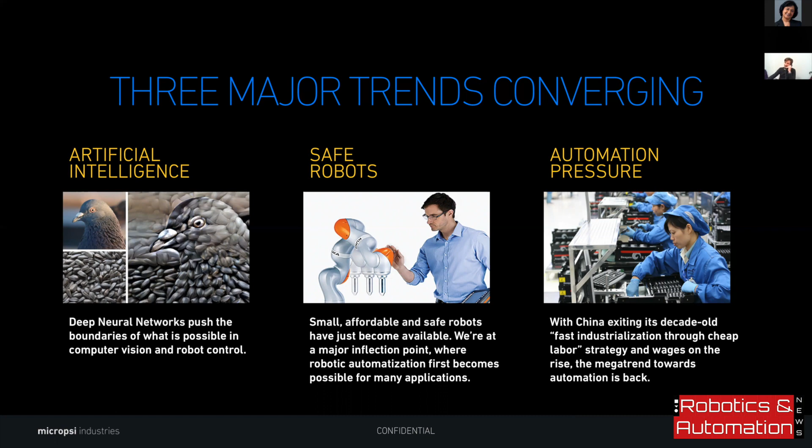So when I talk about industrial robots, especially in the context of artificial intelligence and deep neural networks, people just assume, because they know robots from the movies, that robots are inherently very smart things that know how to do things. And that's because most robots people know are from science fiction and are really just people in metal suits.

So in traditional industrial robotics, problems were solvable with robots when they were fully understood geometrically. There was nothing that varies about it. It always looks the same. It always feels the same. There's really no reason to have any eyes or any brain. You just stupidly make the same movements all over again.

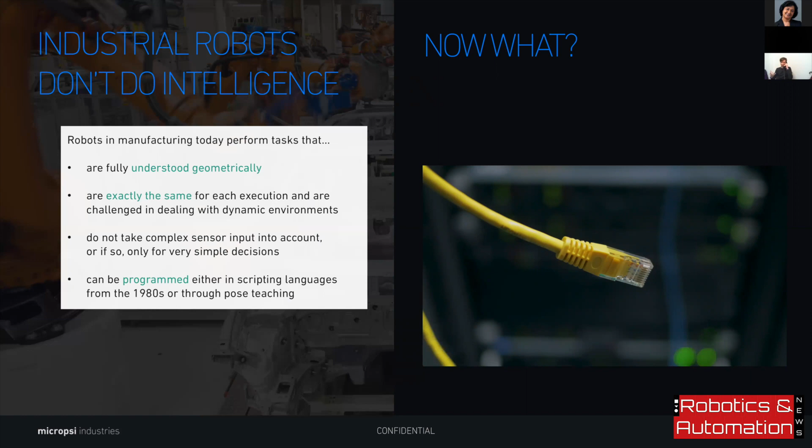But if you encounter one of these, a cable or anything that is soft or wobbly or fiddly in some form or moves about as you're handling it as a robot, you were out of your depth in classic industrial robotics. And what we do is essentially give the robots the ability to deal with these types of problems.

So the technology allows you to create skills for industrial robots that would be impossible or at least very hard, and you need a very high skilled person to create them. And for us, it's essentially something that anybody, you and me, or anybody you meet on the street, could teach the robot to do as a matter of a couple hours, two afternoons.

And then after you've done the training, after you've showed the robot how a good movement looks for whatever you want it to do, then the robot knows how to perform that task and react to the environment in a systematic form and in a clever form. And this is where I am going to pick up the hand-eye coordination metaphor again.

So if you imagine a human plugging in a cable into a socket, what we do is not determine exactly where in space the socket is and plan an approach, how do we orient our hand towards the socket, and then make a very precise linear movement towards the socket. And then if our pose estimation for the socket was right, then it will fit by the millimeter and everything will be fine.

What we do is we just move those two things towards each other, and we make a sequence of very small, very fast corrections as we approach. We coordinate the movement of our hand to what our eyes see. And the technology essentially gives a robot the ability to learn precisely that.

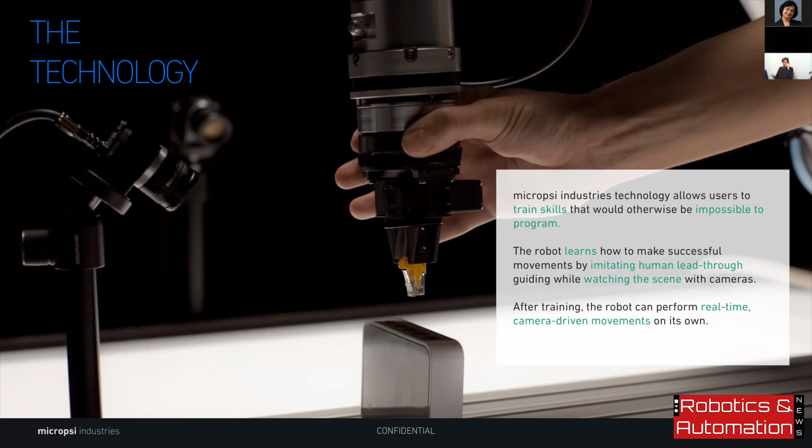So the robot will approach when it plugs in a socket pretty much like a human would, approaching it, going a bit to the side and seeing with the camera, okay, that's too far right, comes back and makes a very confident, very natural-looking, very organic-looking plugging-in movement as a human would make it.

So what's behind there? What is the technology that's on sale from Micropsi Industries? It is essentially a full stack that allows you to do 20 or 30 hertz real-time control from cameras in a closed-loop fashion. So all of this is ours, has been developed here, and allows you to generate skills for industrial robots very easily without a single line of programming.

All you need to do is buy the robot, buy our kit, put up the camera, make sure the cameras see what they need to see to solve the problem, and then you guide the robot through the movements, send the data off to the cloud for training. It comes back, gets installed on the robot. The robot knows how to make the movement.

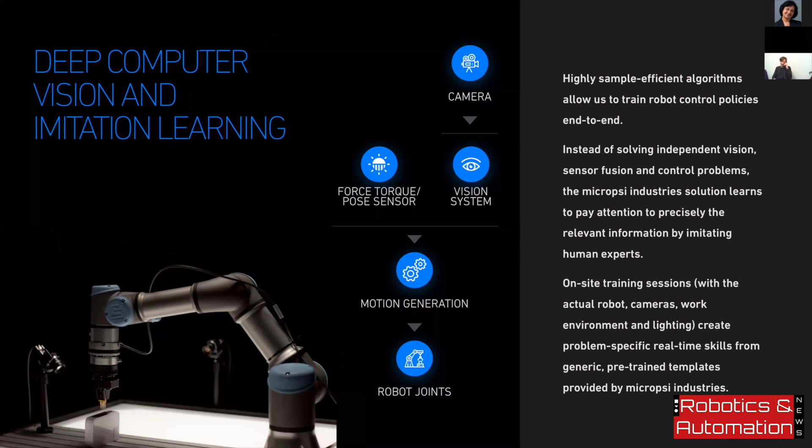Then you can cut the connection to the internet, so you don't need to be connected all the time to the cloud. Just for the training, you need to do that. And then essentially you do the rest of the automation solution that you want to do. Integrate this into your wider program of how material flows through your factory. And as a result, you just automated something that previously only a human could have done. And normally I show a video that shows that in action.

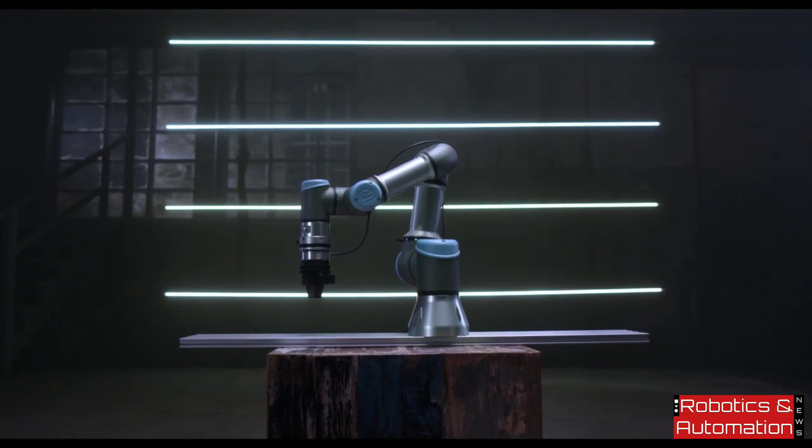So what is the actual product? What do you buy from us? We don't make robots. We're a software company. Assume you're a factory and you want to automate a workplace that's so far been manned by a human or a couple of humans because they work in shifts and perhaps the rest.

So what you would buy is a robot, all the peripherals that you need. This might be a gripper or anything that you need for handling the materials you want to handle. Then you buy the Micropsi Industries Mirai control box, which is a physical box that you put on top of the controller of the robot, and then you connect it. And then on the box there is a tablet app that you can install on your Android tablet, and this tablet app will allow you to train the robot, guide you through the training process.

What you also get is cameras and the force torque sensor. Sometimes we provide them, sometimes you buy them separately, that allow you to do that learning, and these components stay in place when the robot operates. So the robot can feel when it hits something, and the robot can see as it moves through the scene. And when all of this is connected, you essentially take your tablet app, do the setup, guide the robot, and after 2 days, without any programming, you have a way of making the movement that so far the human made, and can integrate this into your wider automation solution.

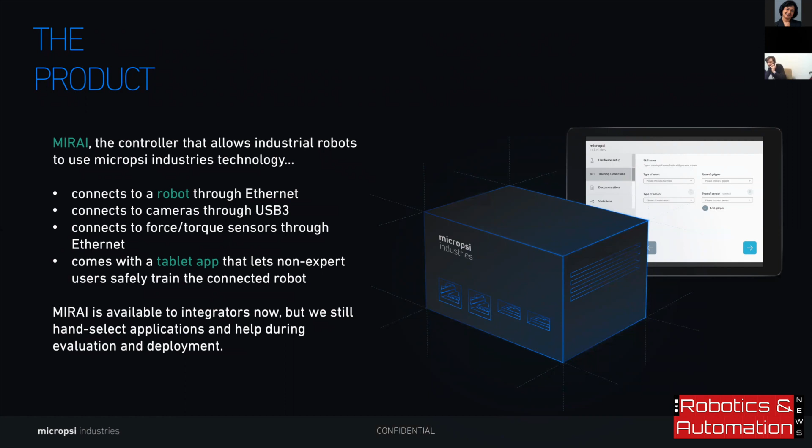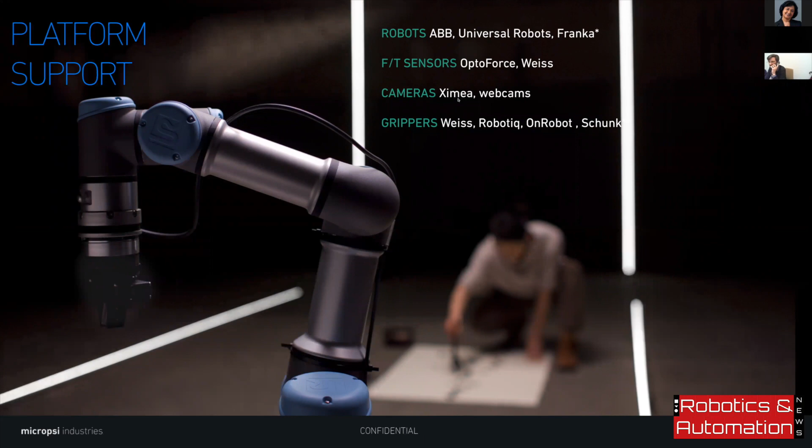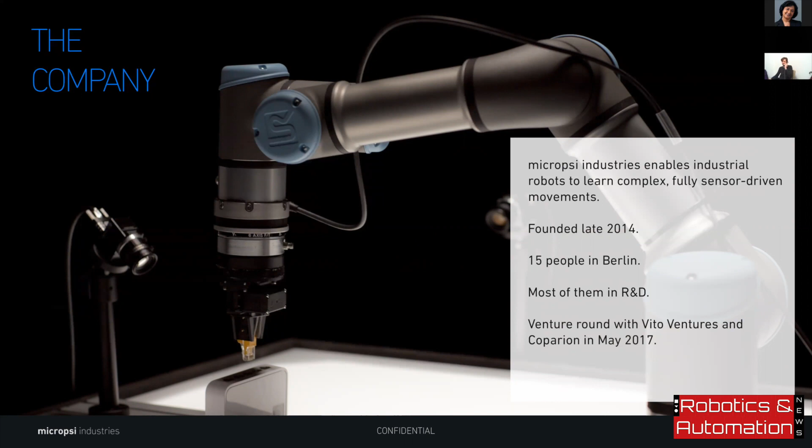So typically, when people want to automate something, they're not just buying this because I tell them this works. They say, I want to have a go at this. Let's try it. And they either send something in, or we come and try: can our product and the robot actually solve the problem that this person is after? And if that works, we put it into production and make it work. So that's all I have for my little speech.

Thank you very much, Ronnie. That was a very interesting presentation, very nice graphics, I must say, graphic design level graphics. I've got a few questions.

First of all, I wanted to understand exactly what I'm dealing with in terms of your solution. You say you're a software company, but you're actually supplying a box, a controller. Is that correct? Yes, that is correct. And how do we reconcile that? Well, it's not a complex issue, but it's just interesting. I wanted to make that clear. Yeah. I mean, the magic of what we do is in the software. The control box just contains a couple of hardware components that we need to be able to do that. And this is not a secret. This is GPUs by NVIDIA.

These robots are driven by neural networks, and you need the hardware to just compute the forward passes for neural networks. So we need to bring a GPU, and we also give you a box when you're buying from us, so nobody has to worry about operating system versions, and it just gives us a stable platform that we can run this from, because we're doing real-time control here. It sort of matters what else is on that computer where the software runs.